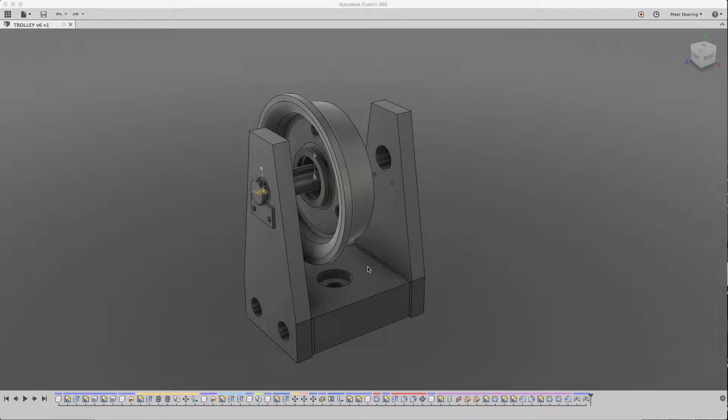So here's your design, and you asked if you screwed it up. Well, no, not really. There's certain things that need to be fixed in it, but other than that, we can make that work.

So what I usually do when I start looking at somebody else's design, the first thing I do is look where's the origin. The origin is an important point of reference when you start debugging a design, and in this case, it's not really aligned with much. So that's probably the first thing we're going to fix.

The next thing is there's a sketch folder at the top level, and in this sort of mechanical design, you want to make sure that all your sketches that belong to the components are in those components, and that's not the case here.

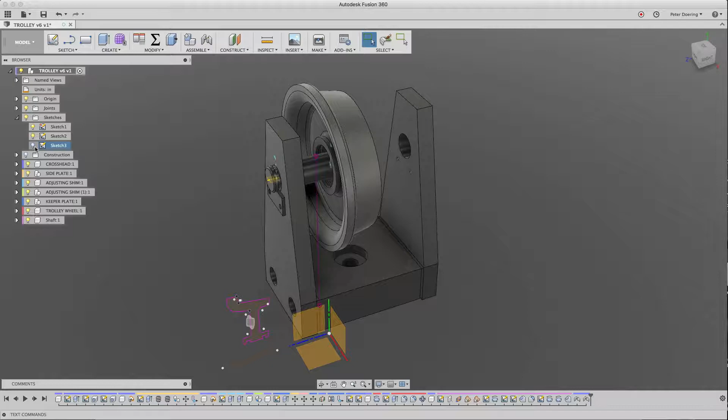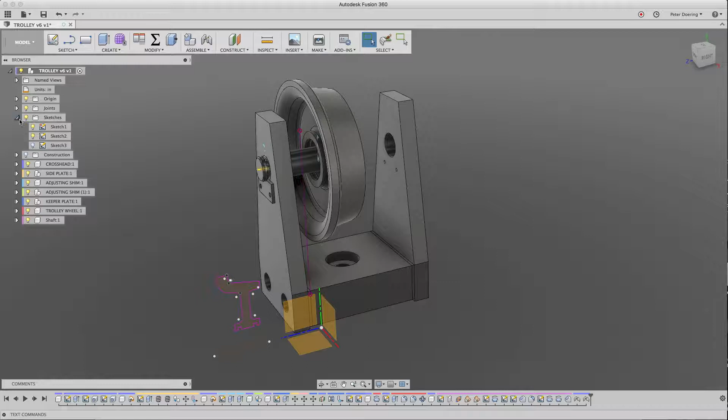The sketch for what looks like the flywheel or trolley wheel is located here, and in the viewport it's here, meaning it's dislocated from the geometry of the actual wheel. The sketch itself in the browser is located at the top level. That's another thing we'll need to fix, because obviously this is the wheel component and there's no sketch in it.

Then I usually take a look at the structure of the assemblies, and I also take a look at the origins here. I can see that also doesn't look awfully great.

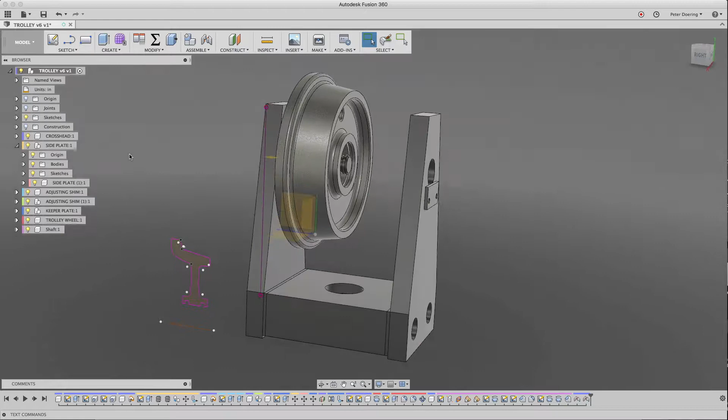Let me take a look at some of the sketches here. I can see that the sketch wasn't located at the origin point when the part was created. That's not great. One should always reference the origin when making a sketch. The origin is such an important reference point.

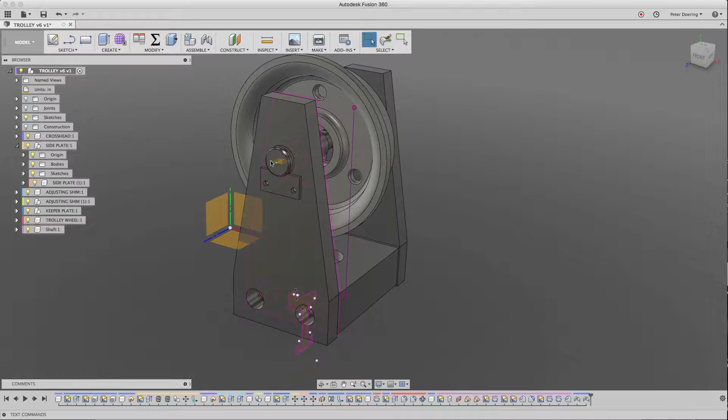The other thing I see here is that this side plate component has a body, and then at the same level with that body it has another component that's actually an identical copy of that body. So the intention was probably to create an identical copy of a component, not of a body. We need to fix that as well.

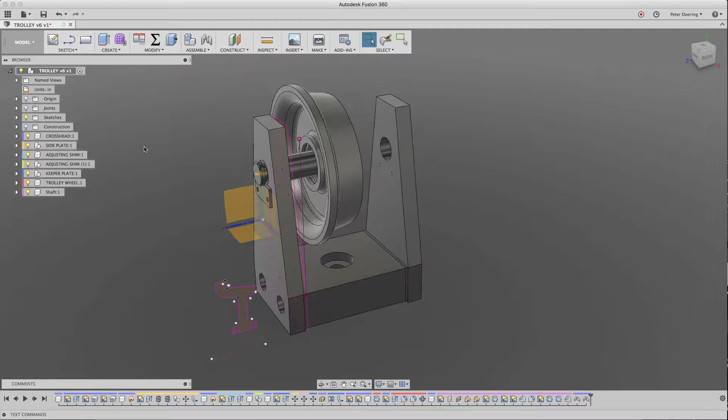But let's start from the beginning. I usually roll the timeline back all the way and just see how this evolves. So you create a component, there's a sketch, and as I already said, this sketch is another thing I'm usually taking a look at.

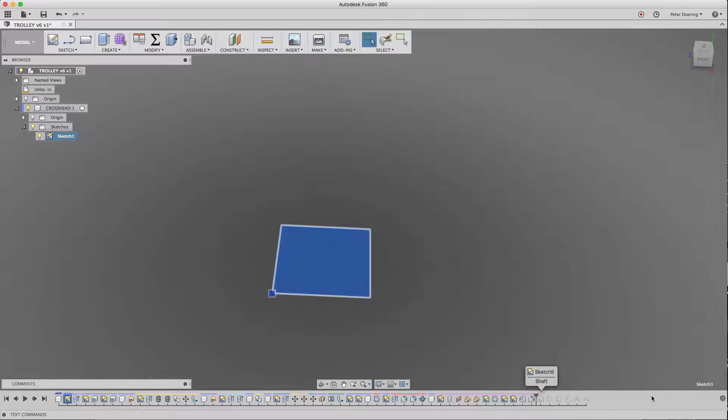Let me roll the timeline back, forward... come on. When I design something myself, I usually, early on before I start designing, take a look at symmetries, and obviously there's a good bit of symmetry here in this design. It seems the design is symmetric about this half.

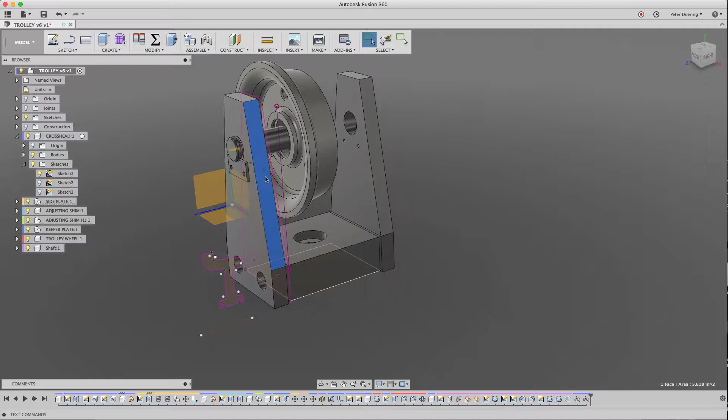At least this side plate here, that keeper plate, and that adjustment plate down here, they're all kind of mirror symmetric to those parts here. But those parts are also symmetric down this line.

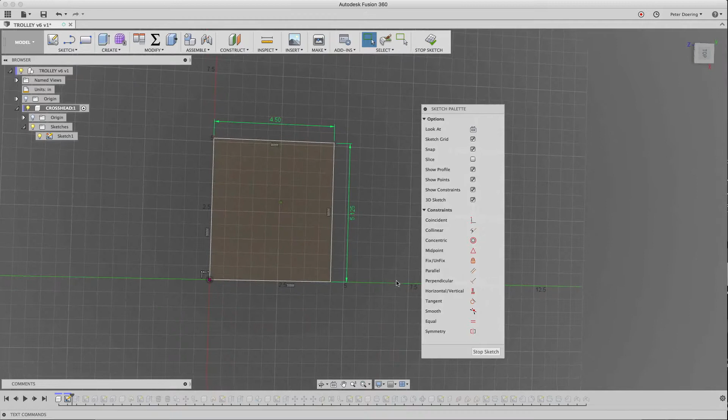Okay, with that in mind, let's roll the timeline all the way back and start from scratch. So there's this sketch, and as I said, symmetry is important. So what I'm actually going to do is move this sketch so that it's centered at the origin point.

There's a constraint here. If I hold my finger on the mouse button, I can pick which constraint. There are two constraints in the same location. One is for this line that's blue highlighted now, and one for the other. I pick the first one, hit delete, and then do the same with the second one.

Now I should be able to drag this rectangle around. So the way I constrain this now to the origin point, I'm going to take a horizontal vertical constraint, pick the origin point, hold the shift key, and while I mouse over this line here, it highlights the center point of that line. When I click it, it constrains it.

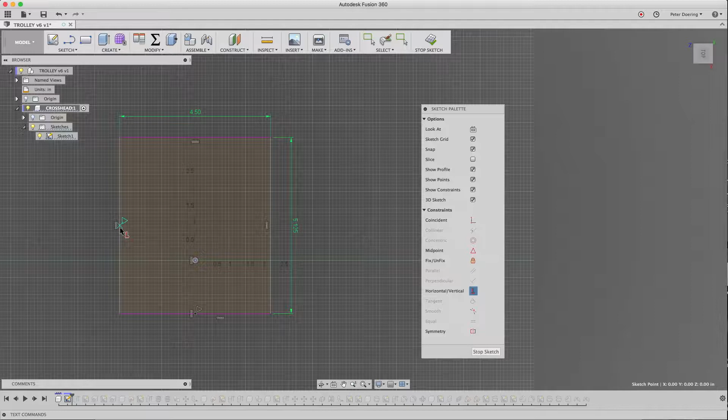I'm going to do the same thing with that vertical line. There it is, and now it's fully constrained, visible when these lines turn white in the visual style and environment I'm using, which is the gray room. Unfortunately that kind of vanishes here in the screencast. When the lines turn white, that means they're fully constrained.

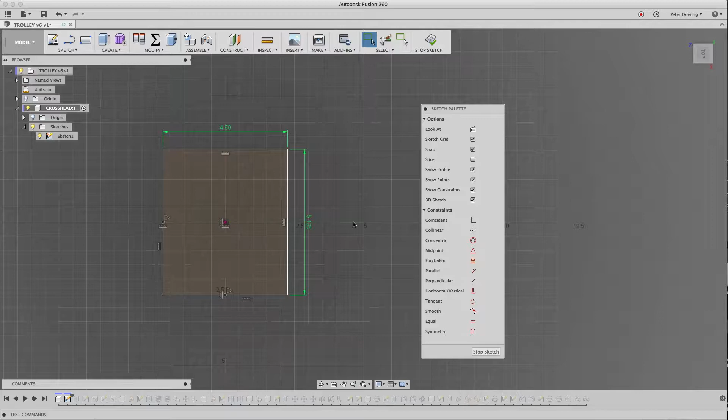Okay, we can stop this sketch and continue with our analysis.

All right, that looks all okay. That looks like the first component.

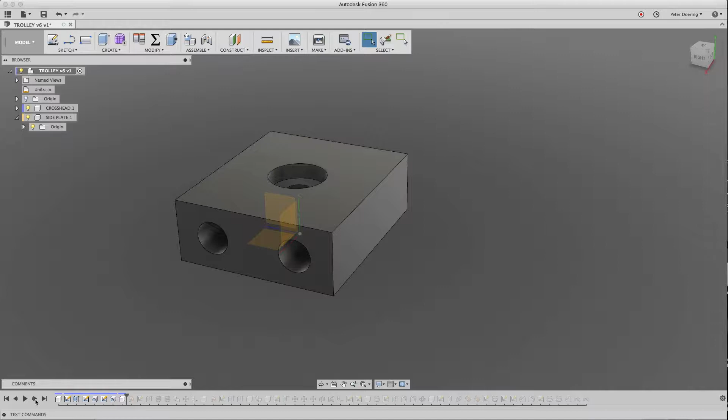And you create a second component, that's the side plate. Let's collapse this and see what we do there. So I can see what you did here. There's the origin point. You wanted to probably create a sketch there, and because that component is in the way, you just move it out of the way and then store the location. That's not a good idea.

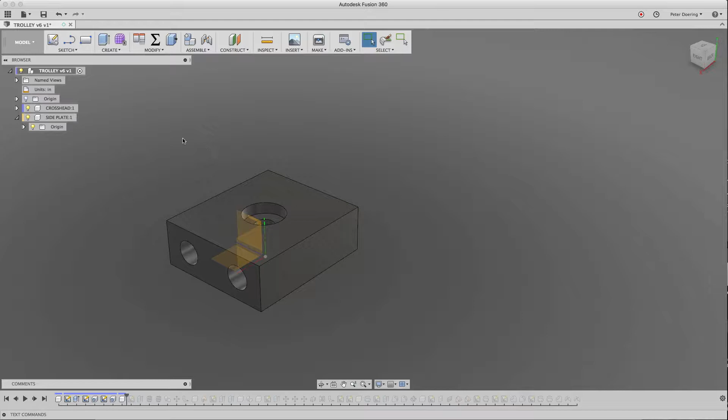So we just delete this. If you don't want to see that component, just hide it. Another way to hide everything else but the component you work on is to right-click on that component and hit isolate, and then you only see that component. There's not much there at the moment. Now there is, but then you can also unisolate.

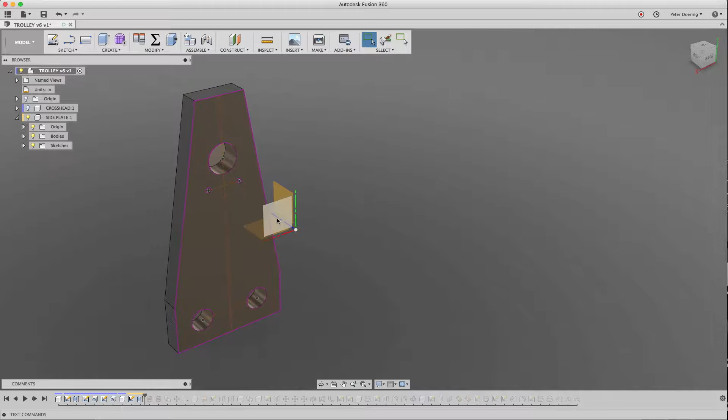All right, but let's isolate this. And that sketch also was not created at the origin or referenced to the origin. So let's roll this one step back and edit the sketch.

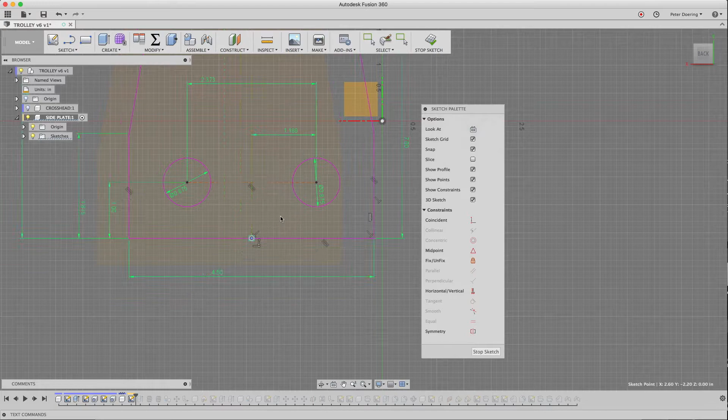And let's see what we have here. Okay, I can drag this around by this line. And it looks like I can just simply create a coincident constraint between this point and origin. Great. Everything turned white. Now this is fully constrained.

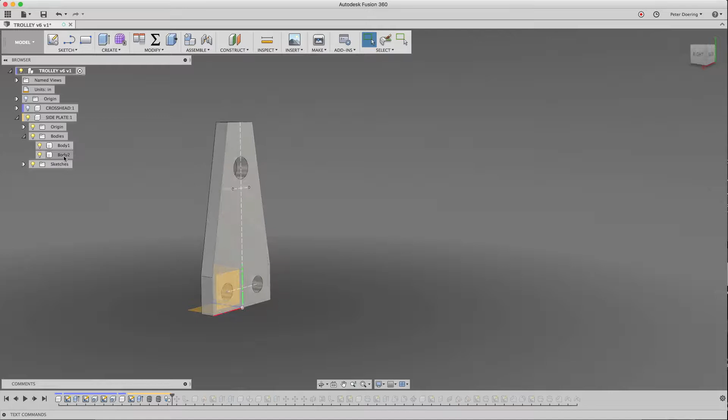So you create that second body, and what you want to do is actually not copy that body. There's a use for that, but that's not this case. And then you move it out of place, and then you put it here into another component that's in that same component. Not a good idea, so we're going to delete this. That's really not needed.

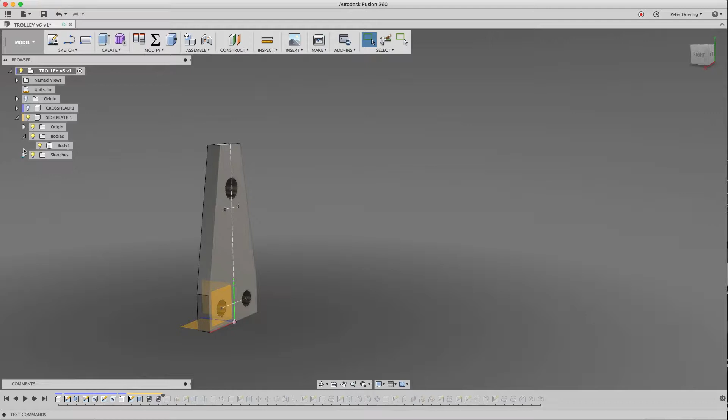All right, so that concludes the side plate. And if we unisolate it, now we have both components in the same spot, and that's okay.

So now you start designing that adjusting shim, and there again you move this out of place, not necessary. We'll delete that operation.

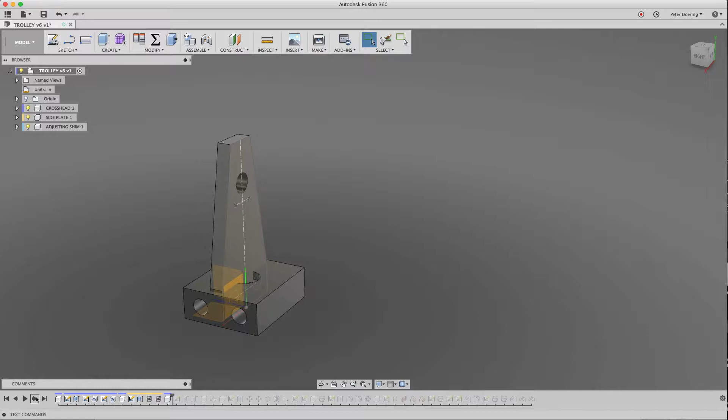And there's a sketch somewhere in the adjusting shim. Let's see. All right, okay, I see what happened. That sketch isn't fully constrained, meaning I can actually pull these around without editing the sketch. You might have snapped those to those holes when you created the sketch. The rectangle here that forms the sketch is actually constrained because it was projected from this body.

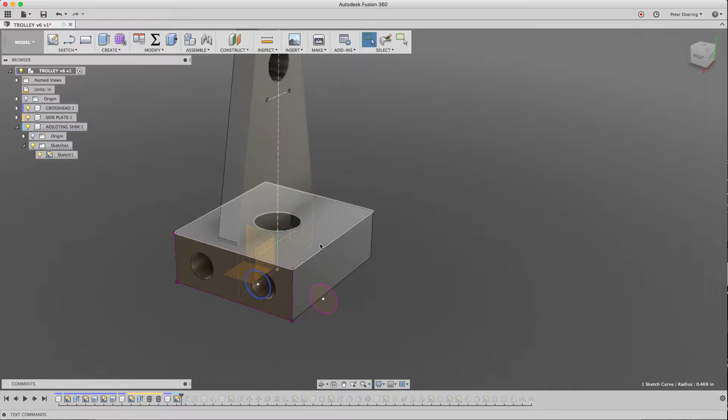And when I moved the sketch that created this body, and then created the volume of that actual body here, that sketch was projected in the correct place. It's just these circles here weren't. But that is easily fixed.

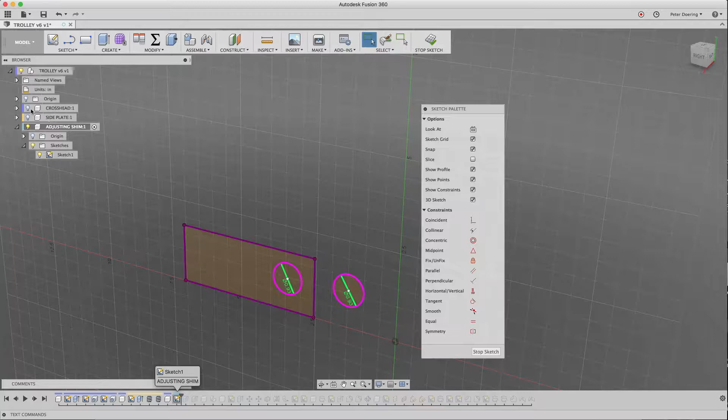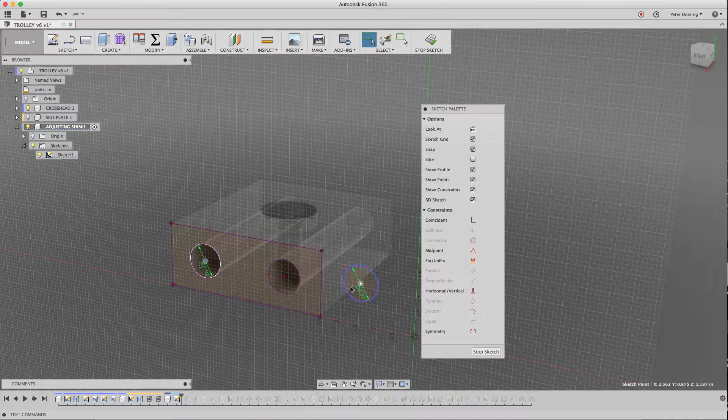So let's hide that, edit the sketch. And I need this back. What I'm going to do is simply project these holes into that sketch. And then I'm just simply going to drag these circles and snap those to the center point of those projected circles. And there you see there's a coincident constraint, and those circles are fully constrained and will remain in place.

And there we have our adjusting shim.

And there you create a second component with another adjusting shim in it, and that's actually also not needed. So I'm just going to delete it. All right, not needed.

So the next thing you're designing is the keeper plate. I think that's the thing that's set on here on one of those sides. So let's see how that looks like.

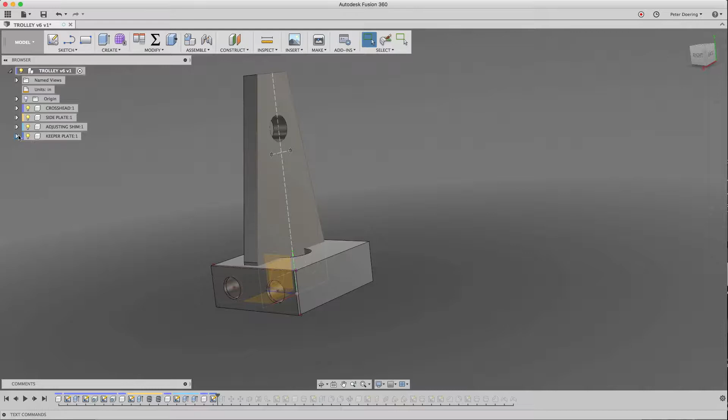There is a sketch. There it is. And just like the adjusting shim, that keeper plate is also designed in place right here on the side plate, which is great. Oh, I forgot something.

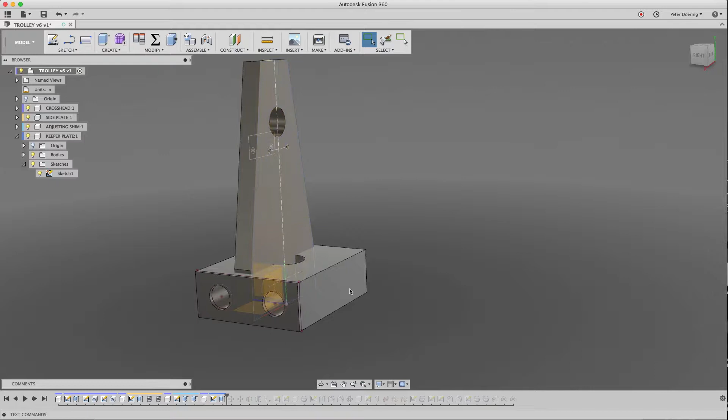Something very important. We are creating an assembly, and in any assembly, at least one component has to be grounded. Because if you don't ground them, you can just drag them around in the viewport and lose their location. And we don't really want this.

So what I'm going to do is roll the timeline all the way back. And you can ground a component as early as it's created. Even if there's nothing in it, you can ground a component. So let's go ahead and do that.

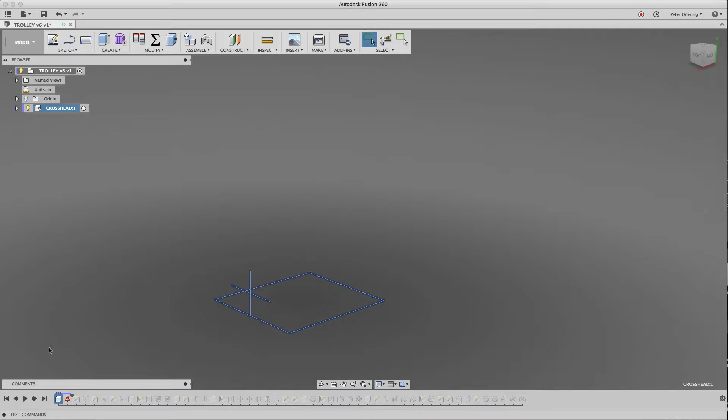So because later on when we created this sketch, we centered it on the origin point, now when we create that component and move everything back in place here, that component is grounded. Now we can grab it like we want to, but we can't move it.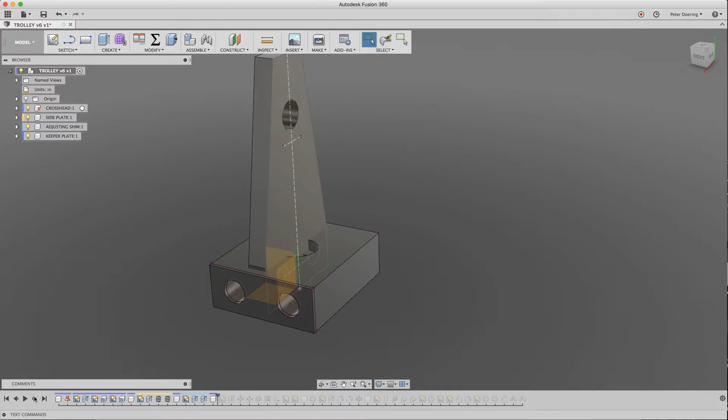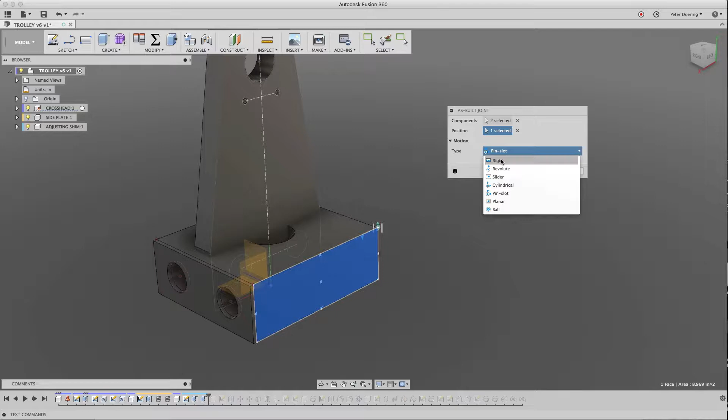But the adjusting shim was designed in place. And because it was designed in place, as soon as we have it there completed, we're just going to simply use an as-built joint or an as-built rigid joint. And there this plate is fixed in space. Okay, so there's our keeper plate. We weren't quite done with this.

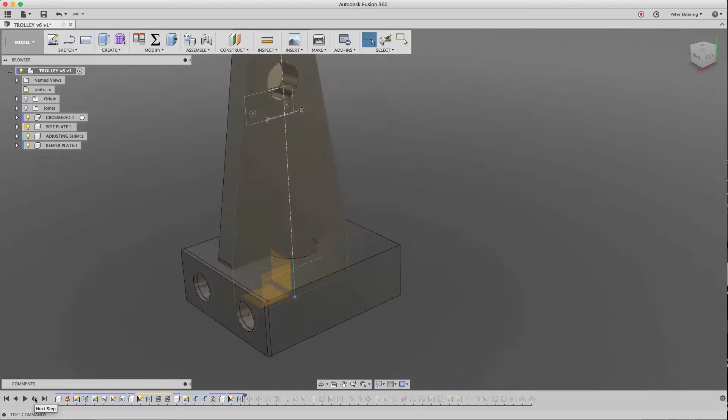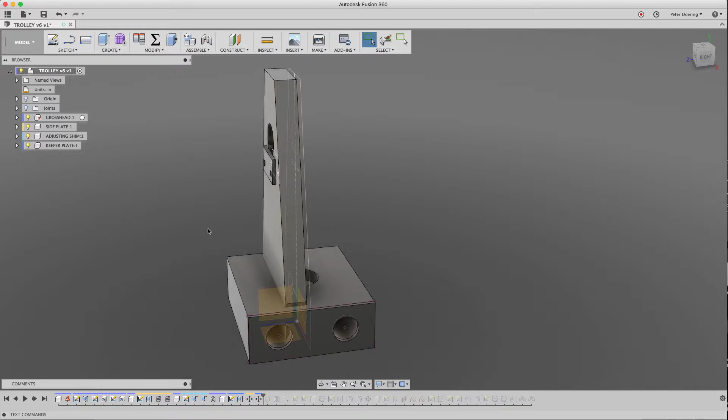Design in place, and there it is. And there you do another thing that you shouldn't be doing. Because of your design style, you need that offset here from the adjustment plate. And you move these parts away. You actually don't move the component, you use the body. You move the body away from the sketch in the component. Then you do the same with the keeper plate. We don't need that.

We delete these operations as well. All right, so the keeper plate is right there in the location that it needs to be on the side plate. So here also we're going to use an as-built joint.

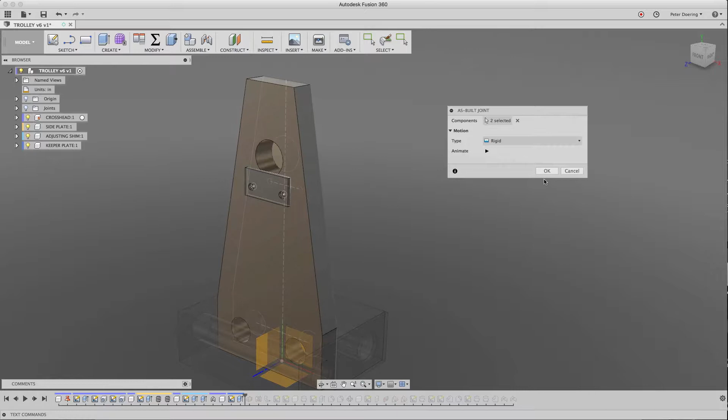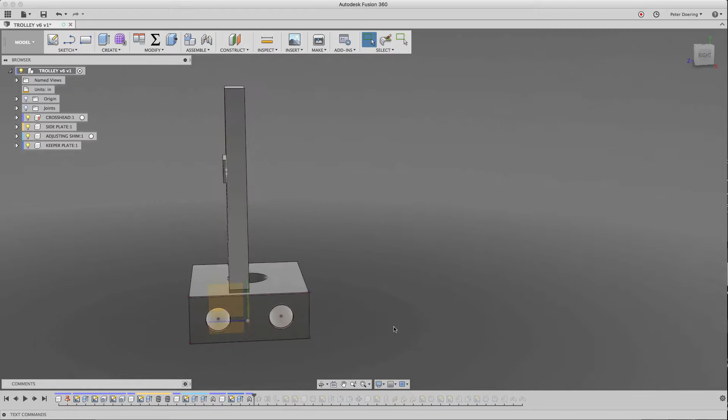All right, so now that we have the side plate and the keeper plate assembled, and the two other, this adjusting shim assembled to the crosshead, we should go ahead and assemble the side plate here to the adjusting shim, and we're just going to simply use one of the joints here.

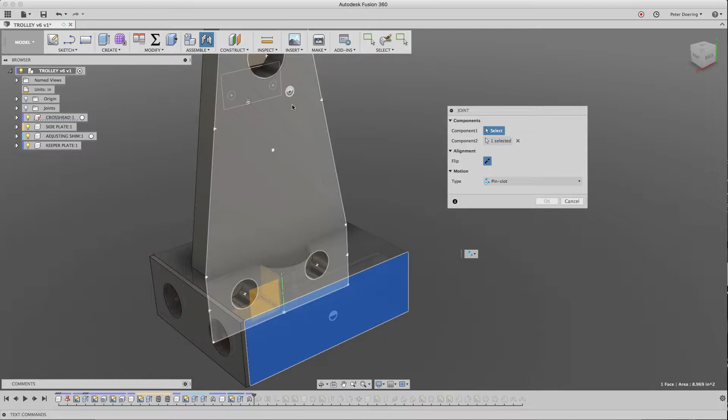So I'm hovering here over the surface. If I hit the command key, or the control key on Windows, I can constrain it here to the surface, and actually it will always go to one of those snap points. We're going to use this here. No, I don't need a pin slot. I'm going to use a rigid joint.

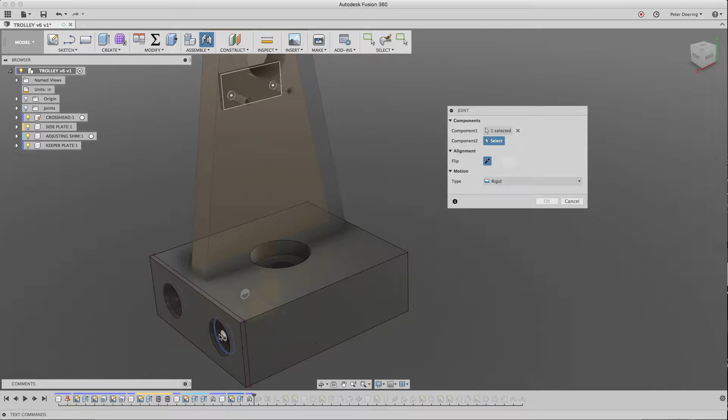It's currently not on that face, but we're going to place it right here.

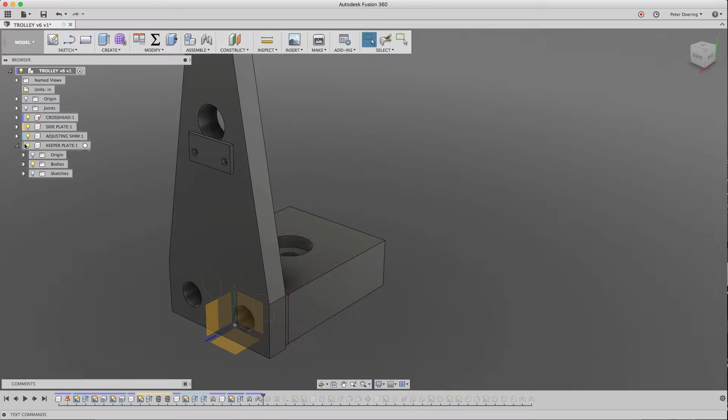So now I have those three components, and I would like to actually create copies, identical copies of those on the other side. So what I'm going to do, I'm going to create another component, and I'm going to call that side plate assembly.

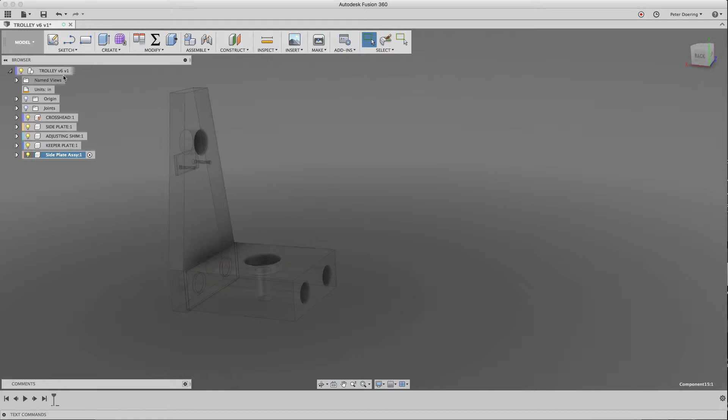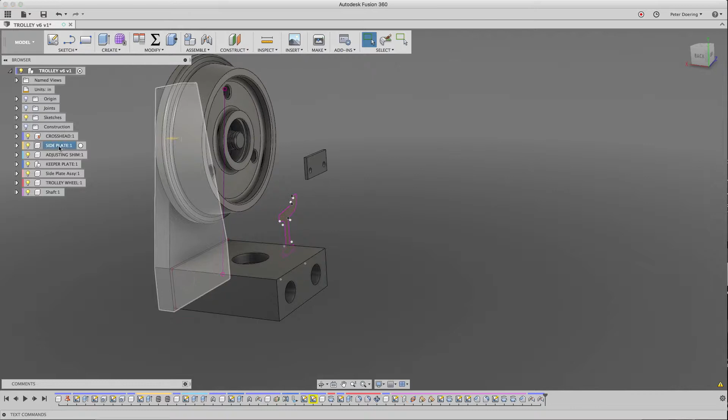And when I created the component it was automatically activated, but I don't want this at the moment. I'm going to activate the top level, and I want to move those three components into that side plate assembly. The only way I can do this is by moving the timeline all the way forward to the end. And there they are, moved into that assembly. This has to be done at the end of the timeline, obviously.

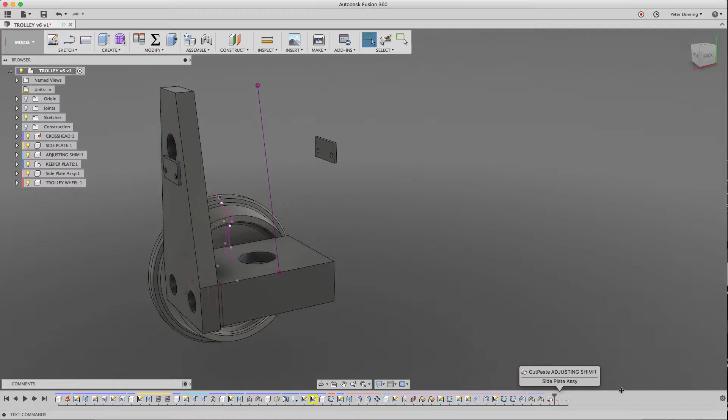And if you move the timeline back, they're here in the structure again. And if you move it forward again, they're back in the side plate assembly.

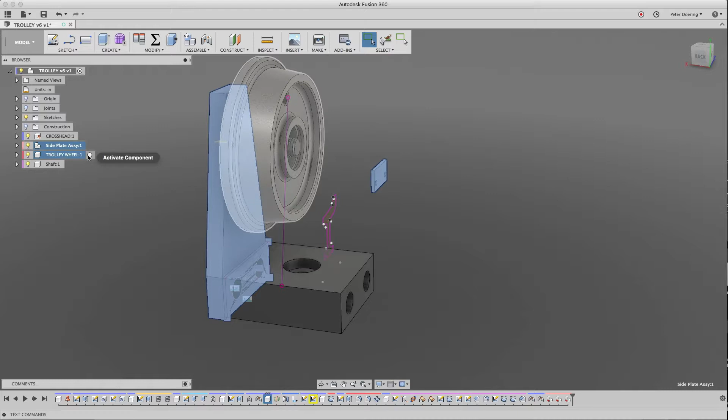What I'm going to do now, I'm simply going to copy and paste that side plate assembly and then join it to the other side. There are several ways to do that. You can actually just right-click it and copy, and then paste. Or you could actually hold the command or control key and drag that side plate assembly onto the top assembly. And there it is.

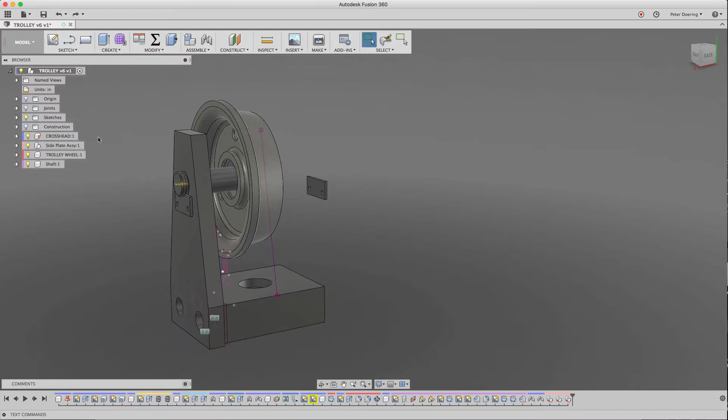And there's too much. Let me undo this. I think if we go here into the keeper plate, yep, same thing. You designed a component in the component, you copied a body, etc., etc. We don't need this. So let's go back to the keeper plate and undo that. Those operations are there, not needed. So there's the keeper plate.

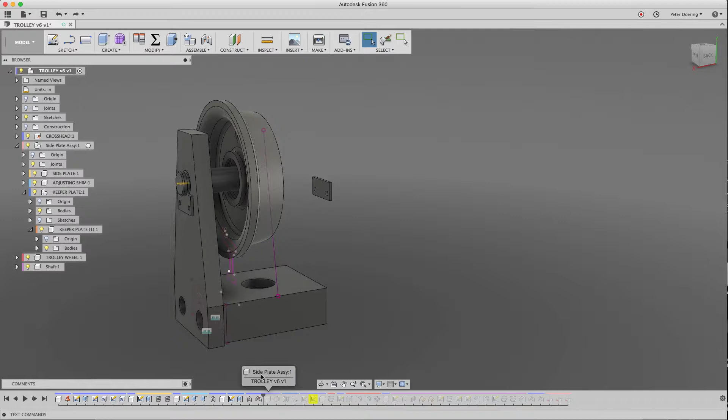They create that mirror. Yes, that stuff is also not needed. You don't need to mirror a component in this case. That's not a good idea.

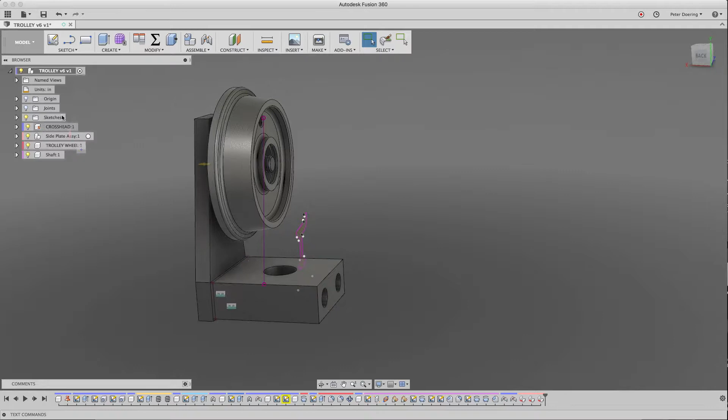All right, I move this all the way forward, and there's my side plate assembly. And I'm going to take it, hold the command key, click it, and move it up here. And one thing that is good to know is it asks you now to move it into location. So the first move after a copy-paste operation, or when you insert external components, linked components, the first move is free. It will not be recorded in the timeline.

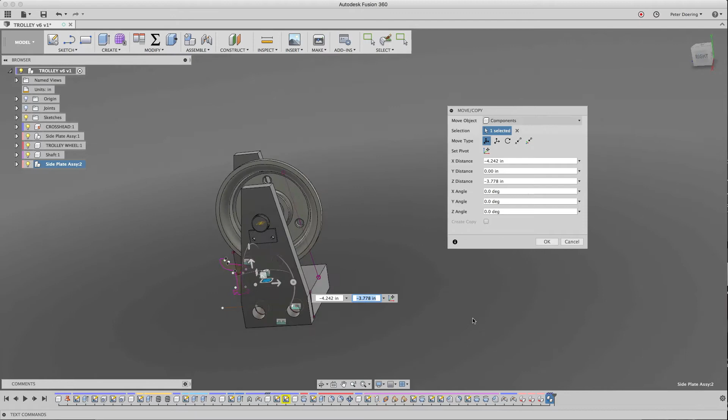And that's great. So my recommendation is to move it to a point where you have easy access to the geometry that you use for joining. So I'm going to move it here, and I'm going to create a joint just like I did before. All right, joined.

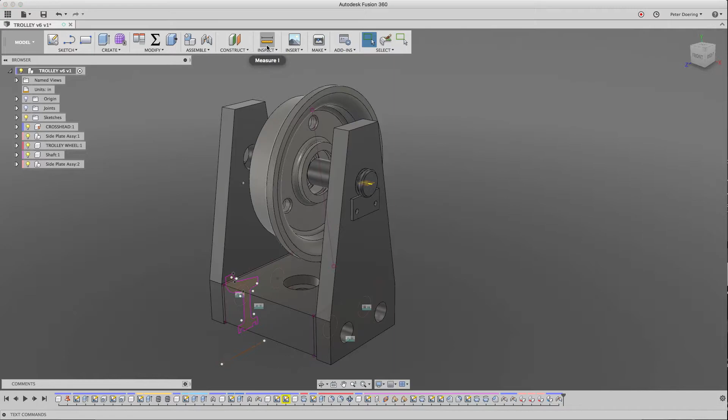So there's one more thing that is bugging me, and that is this wheel, and the fact that the sketch for this wheel is not in the wheel. So one thing I'm going to quickly do is I'm going to inspect this radius. That doesn't tell me much.

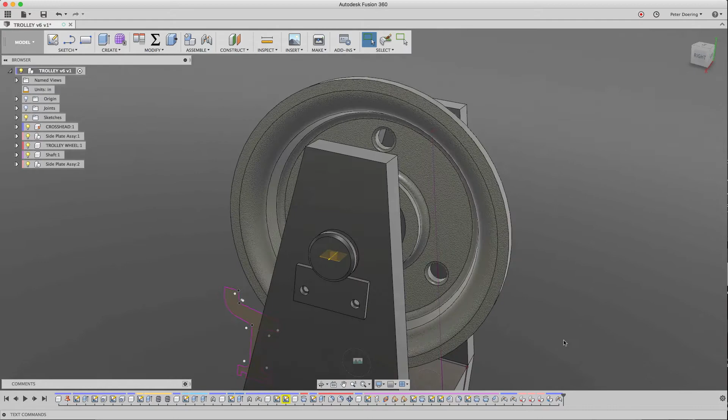0.625 inches. Okay, hopefully I can remember this. Now we're going to fix that thing. So there's the side plate assembly. Where's the trolley wheel?

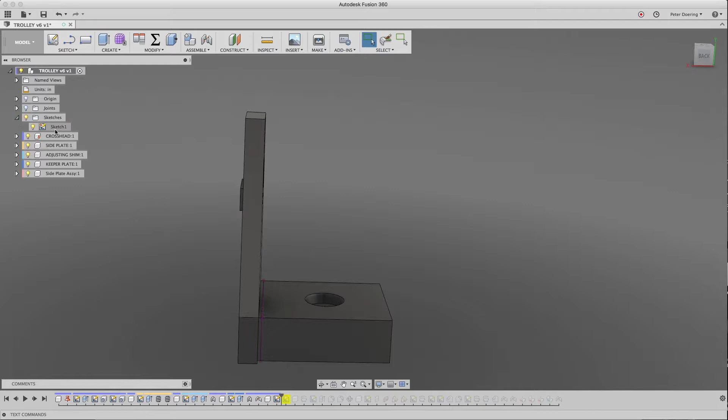That sketch is showing, but there seems to be nothing in it, so I'm just going to delete it. And there is the sketch for the trolley wheel. And obviously it's here, and it's not created in that component. So let's see what else we have there. There's the trolley wheel component. There's the revolve, and there's another sketch, also created here at the top level.

So what you forgot to do is when you create that trolley wheel, you didn't activate that component. And when you then created the sketches at the top level, and then revolved, the revolve actually happened in the component. So what we need to do is delete that.

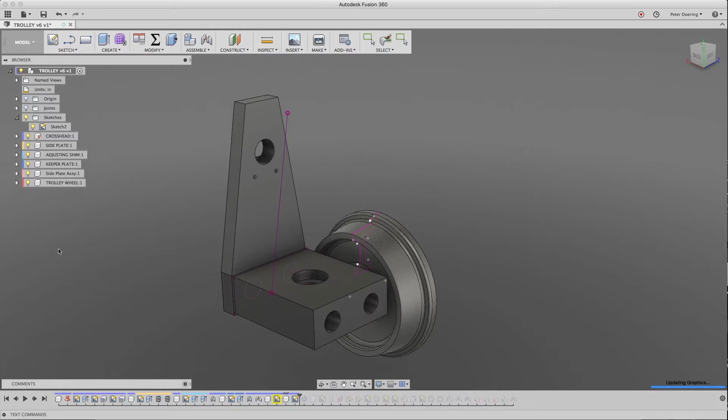We will delete the revolve feature, and we get a complaint because that sketch was sketched on a face of that trolley wheel, and now it lost its reference plane. If you look at the warning, that's probably what it's going to tell you. Review warning - yeah, sketch plane is lost. We'll fix that later.

So now we have a trolley wheel, and we should be able to take these two sketches and just pull them into that trolley wheel. And that only works with one of the sketches.

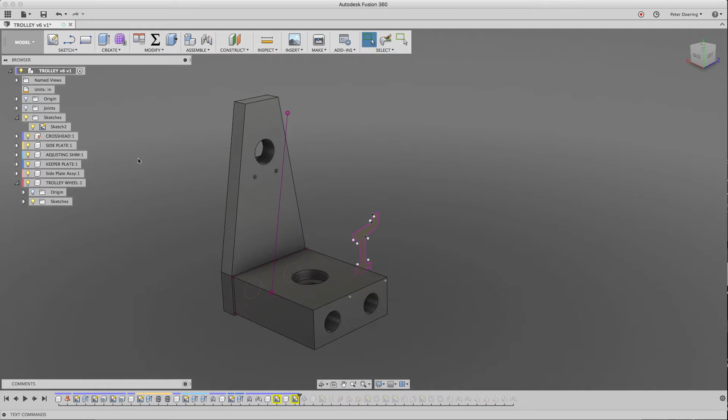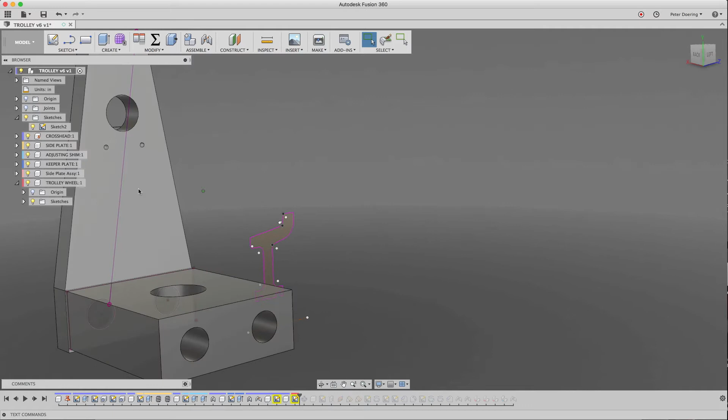So let me look at that sketch and wonder why that doesn't work. I think I know why. If you look at this sketch, this is just a normal sketch with lines, arcs, etc. that were designed in that sketch and created. But this here, this dark purple, indicates it's a projected line.

And that projected line creates a reference to another body, probably one of the side plates here. As soon as a sketch has a reference, you can't just move it into another component. So what we're going to do is simply delete that reference.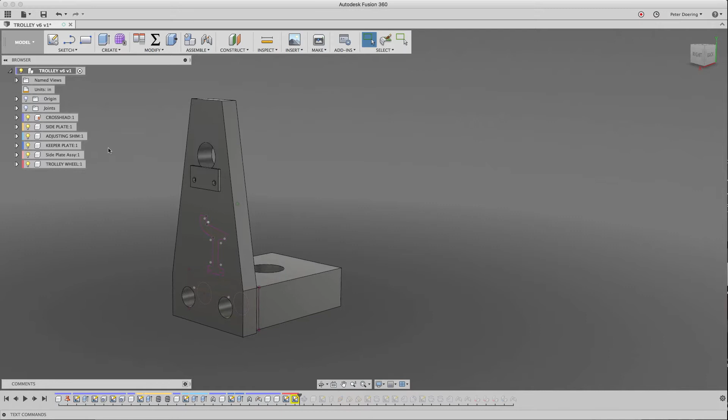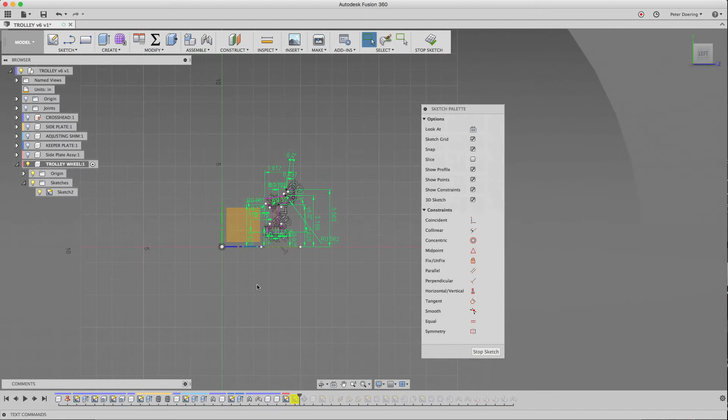And then we can move it into the trolley wheel, hopefully. Yes, we can - there it is. Great, so now we can just look at that sketch and look where the origin is. And see that the trolley wheel was also not exactly located at an origin when that assembly was created.

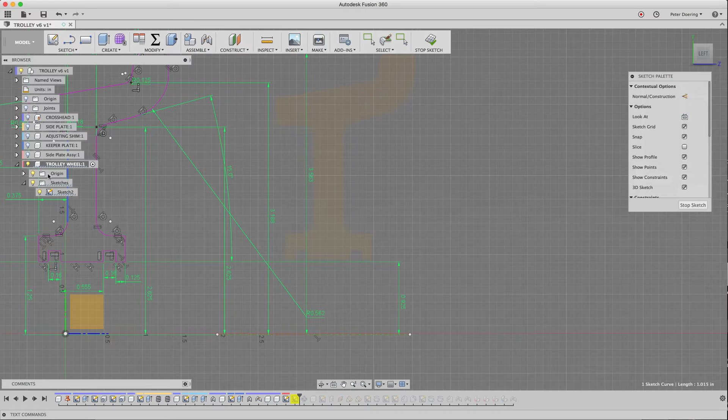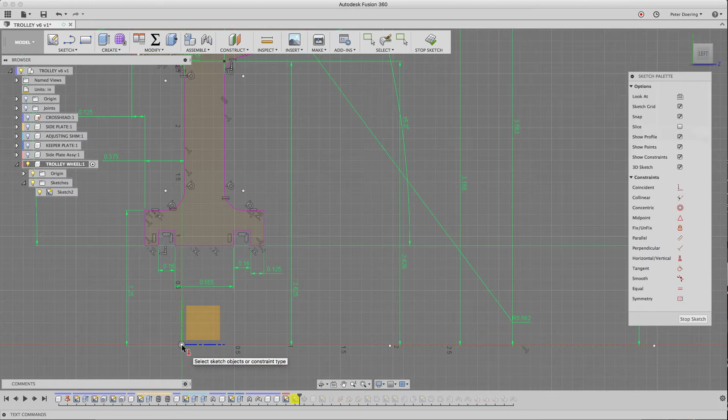We'll just drag this over here and create a horizontal vertical constraint between the origin and that line here. There it is. It still doesn't fully define the sketch because there are still elements in light blue, but I'll leave that for now.

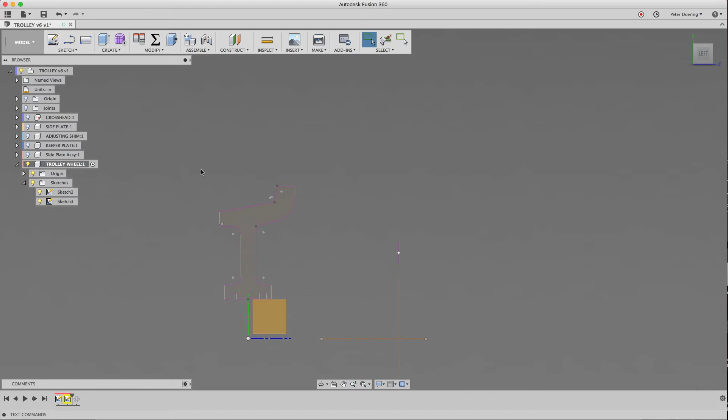Then we're just going to simply go ahead with the activated component - don't forget that. And revolve this thing and make another wheel out of it.

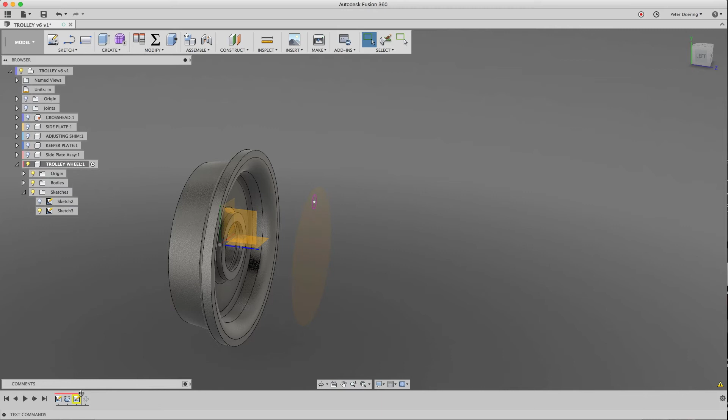Naturally, that sketch is still complaining about its lost reference, and that's okay. So we need to take that sketch and pull it after the revolve, because it was created on a face of this revolved trolley wheel. So we're going to right click on this sketch, redefine the sketch plane, pick the face it was likely created on, and there's the sketch, and it doesn't complain anymore.

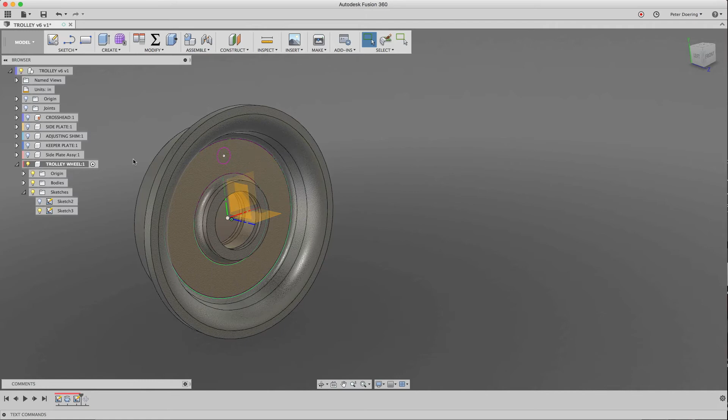Alright, so there was probably an extrusion there. And I'm just going to accept that. And instead of making that fillet afterwards, we're going to make it now. And no, not two separate ones - we just use one.

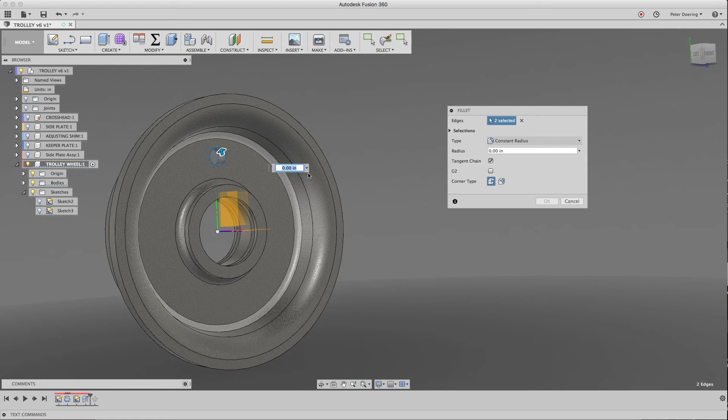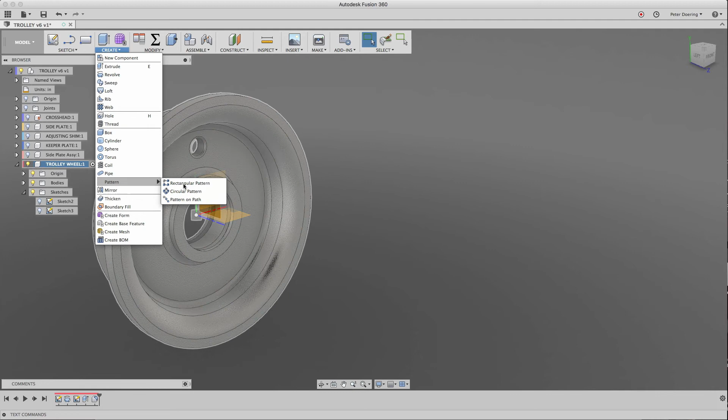0.625 inches. And then we are going to make this thing - well, that isn't really needed, so we need to do this again. Create a circular pattern, and instead of faces, we pick features - I'm going to pick that cut and the fillet. Select the axis, and there we have our features. Alright, that's the trolley wheel.

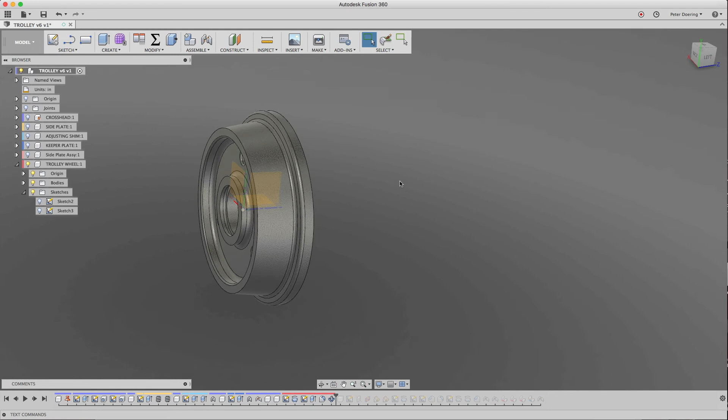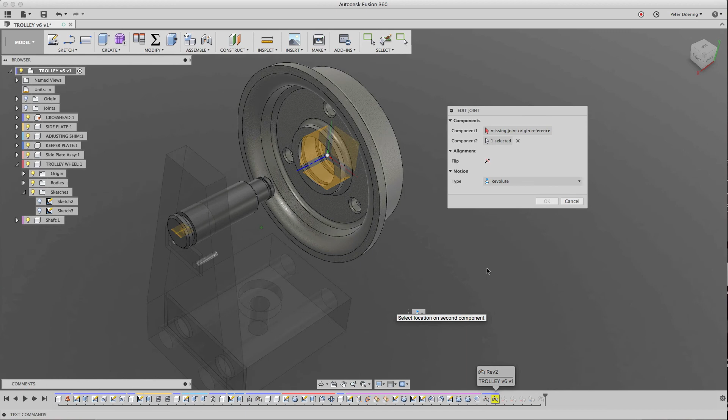Right, that trolley wheel obviously doesn't sit where it was located previously, so in this case that's the joint that is out of location. So there was a joint origin somewhere located. I'm not going to fix that - I'm just going to delete this joint.

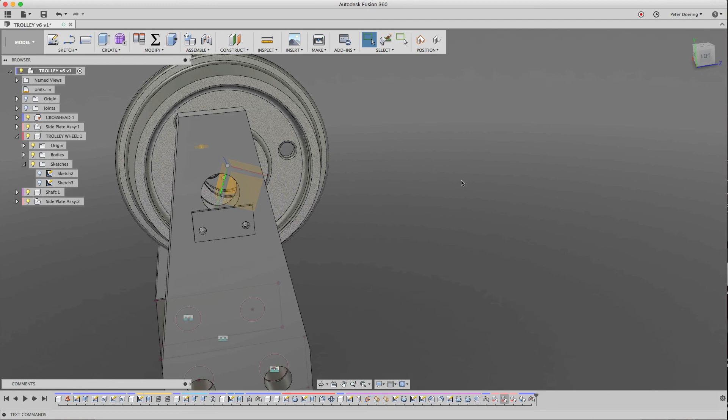So now you can join that trolley wheel where you want it. Hopefully this shows some techniques for how you can fix a design that is in need of reorganization, and makes it much easier and logical to work with.